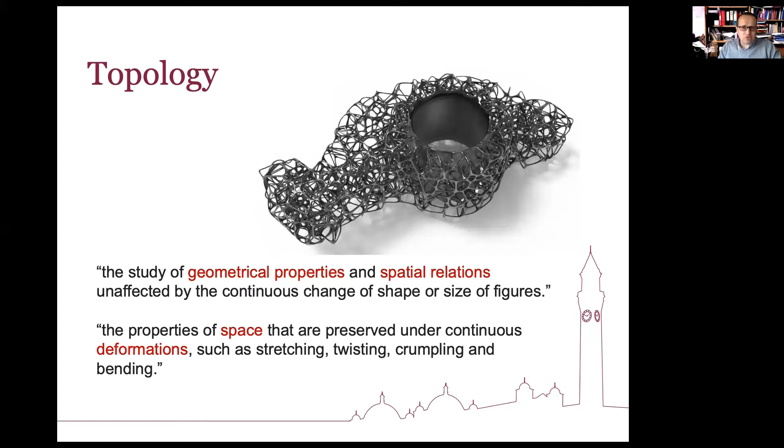For a number of years, people have been using topology optimization in additive manufacturing. Topology optimization is a mathematical framework applied in many software packages, where material layout can be optimized within a certain space by applying boundary conditions - whether mechanical loading, thermal constraints, heat transfer, fluid flow, and so on - with the goal of maximizing the performance of that component.

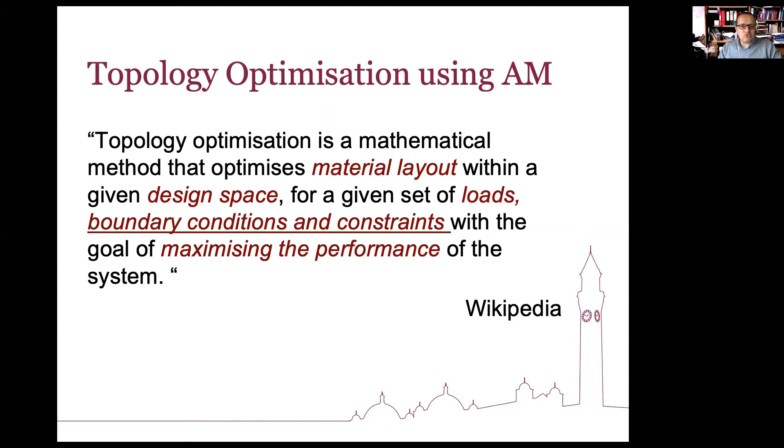One example seen at additive manufacturing conferences for years was the famous Airbus bracket, previously made out of steel, heavy at around 0.9 kilogram. The shape was not optimized for mechanical loading, so the maximum stress was around 840 megapascal. By using topology optimization to redesign the component in titanium, the shape was redesigned and printed by additive manufacturing, achieving a component almost half a kilogram less than the original.

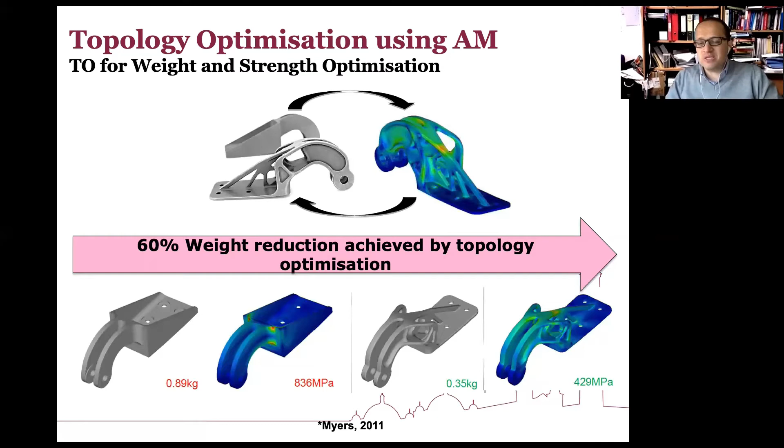Because of the use of struts and that kind of biological design, loads were distributed more homogeneously, with stresses approximately halved compared to the original component. So massive weight reduction and maximum load reduction were achieved by topology optimization. That's probably the commonest example, but what I'll talk about today is how the science and art of controlling where material is in space may improve the behavior of many other applications.

Today I'll give snapshots of different components and materials, like the ones available on the left-hand side, commonly printed nowadays: aluminum alloys, nickel superalloys, titanium alloys, nickel-titanium shape memory alloys, soft magnetic materials, materials with low coefficient of thermal expansion like Invar, and refractory metals used in high temperature applications.

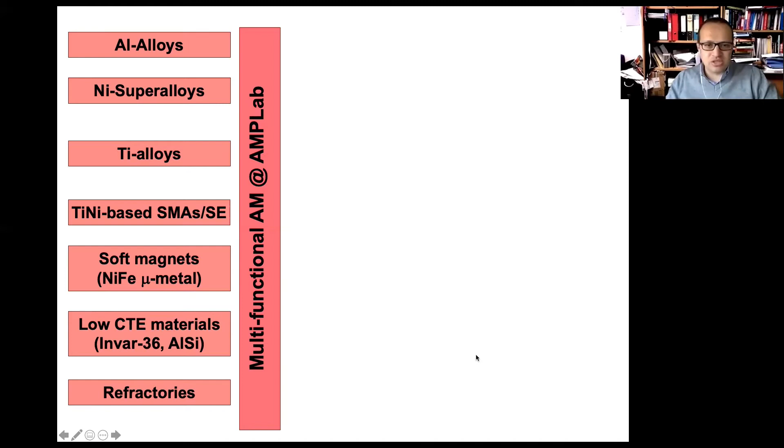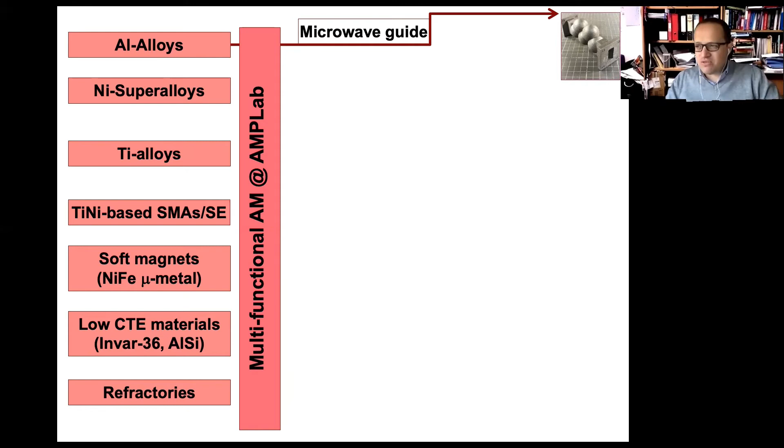When we put these in an additive manufacturing context, we get totally new applications, probably the first time we see them. The first one I'll talk about is radio frequency and microwave guides, which can be optimized and printed using additive manufacturing, achieving superb performance that can be very difficult to achieve using conventional manufacturing.

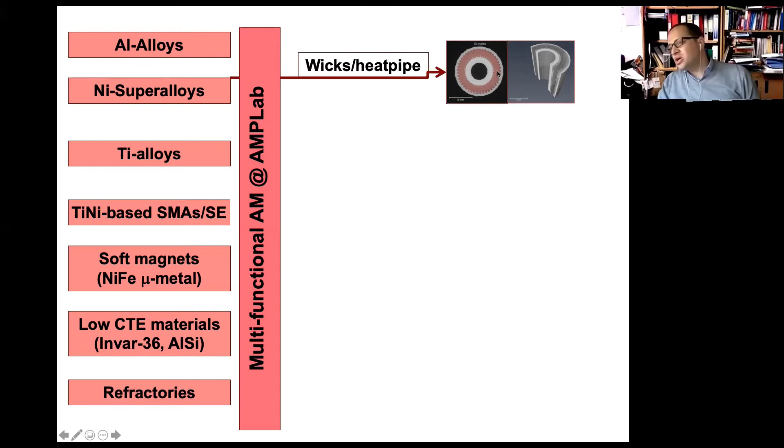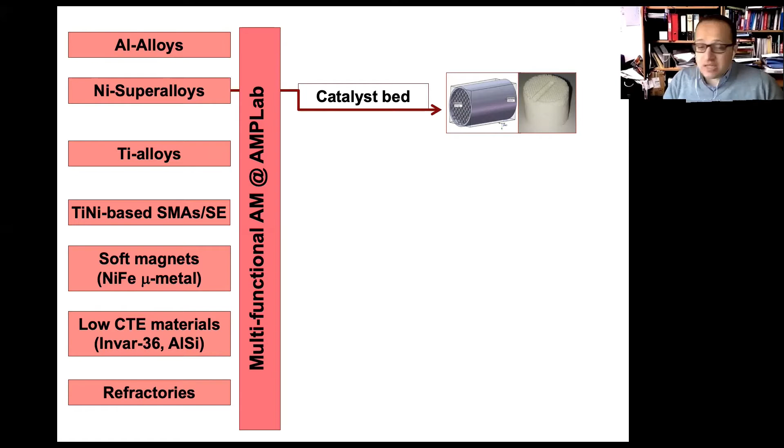Then I'll talk about nickel-based superalloys, printed to maximize heat efficiency and heat transfer properties of heat pipes for thermal management in different applications. I'll also talk about their application in catalysis, in components which require a high surface area to volume ratio to enable the application of high temperature loads.

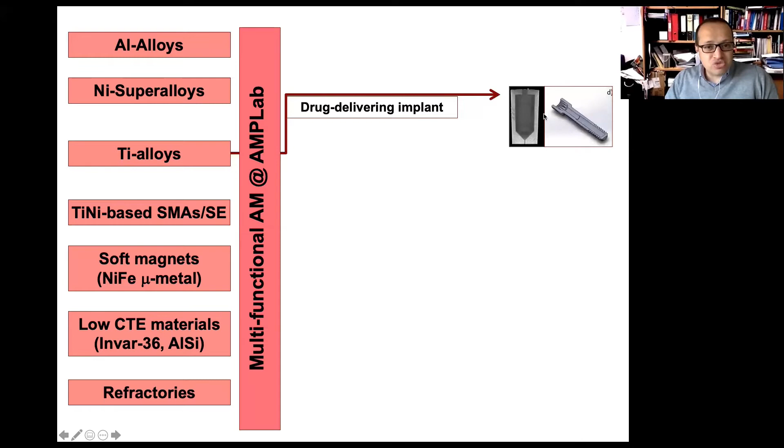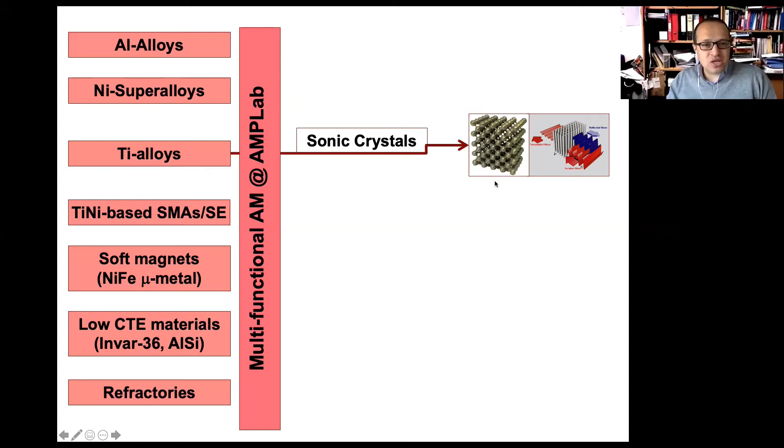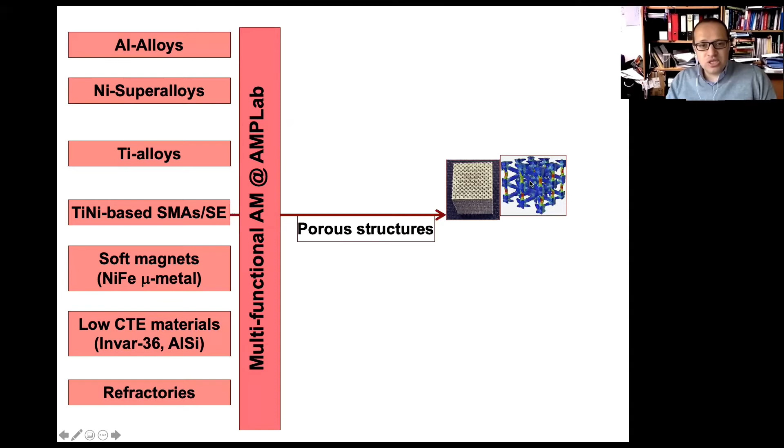From there, I'll talk about titanium implants and how they can be redesigned to deliver drugs by having cavities within those shapes. I'll talk about sonic crystals in titanium alloys, which are shapes with certain acoustic behavior achieved by optimizing topology. Then I'll talk about lattices and stents as a way of optimizing shapes and topology, and about porous structures and their applications in medical implants.

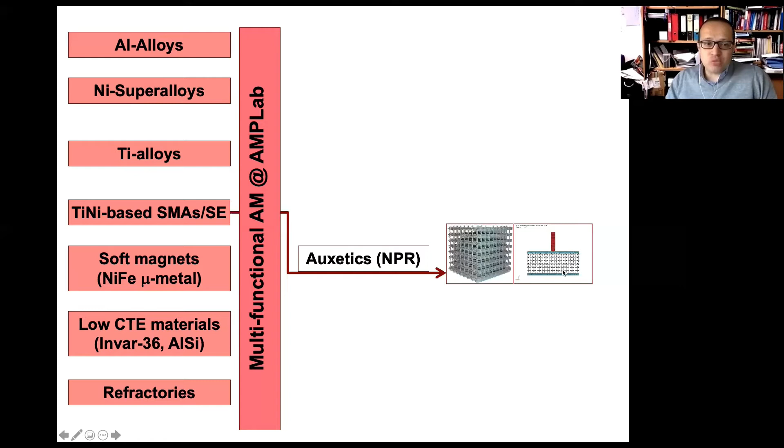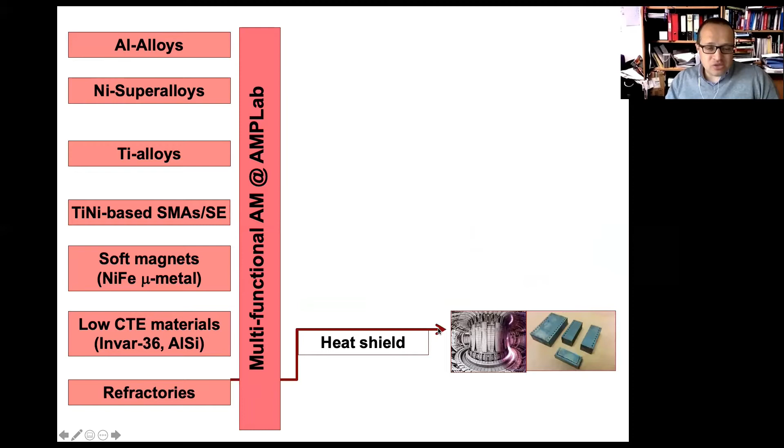I'll talk about negative Poisson ratio materials and their application in shock absorption. Beyond that, I'll talk a little bit about magnetic shielding and low CTE structures and materials. And then finally, I'll talk about high temperature refractories, applied in nuclear fusion applications, and also about X-ray collimation.

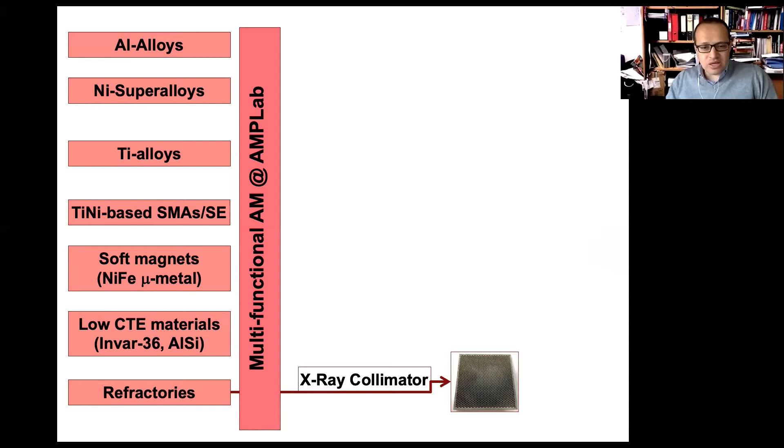Let me start by an exciting application which comes from the space sector. I showed you this shape, the so-called sonic crystals. Sonic crystals demonstrate an interesting arrangement of material in space, and that arrangement is used to dampen the sound waves.

As a sound wave goes through the sonic crystals, you can see that only a small amount of that big amplitude survives, and the majority of the amplitude is reflected backwards. So by designing the size of the ball and the distance between the balls, you can tune that structure to reduce the load and to block a certain sound frequency, provided that you know the frequency and exactly what you want to block.

This was part of a program we did with the European Space Agency looking into the use of these sonic crystals for noise reduction in launch pads, which are known to be very noisy. Through this, and by using additive manufacturing, you're able to create different complex shapes that can be used to tune the frequency and the noise damping behavior, allowing us to achieve much quieter operating structures.

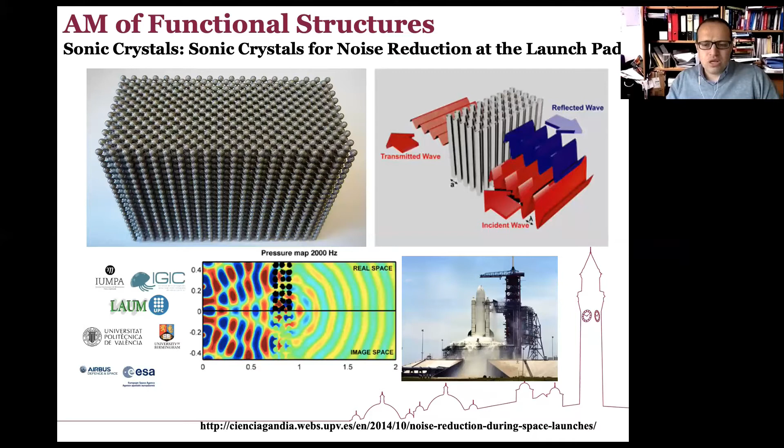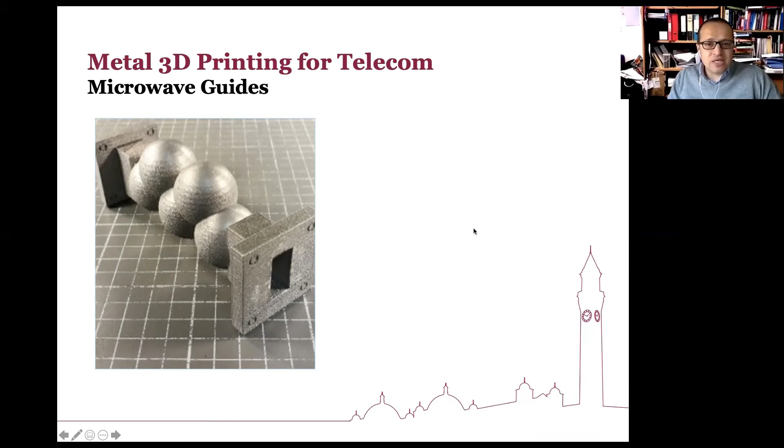We've been printing these parts out of aluminum alloys, which are well established and well defined in additive manufacturing. The good news is that the shape you print by additive manufacturing is literally spot on the required frequency, compared, for instance, with metal casting, where you see more significant variations in the tuning of the frequency of that shape.

More importantly, if you want to improve the level of quality of the signal, you can apply surface finishing using grinding techniques to clean the internal surfaces and cavities, allowing us to achieve a quality value, the so-called Q value, which is very close in quality compared with the ideal material, designed of pure aluminium with a surface finish of 1 micron RA.

Printing it using a high-strength aluminium alloy like this one can allow you to make the thickness much smaller, and as a result also achieve an additional benefit when it comes to weight reduction.

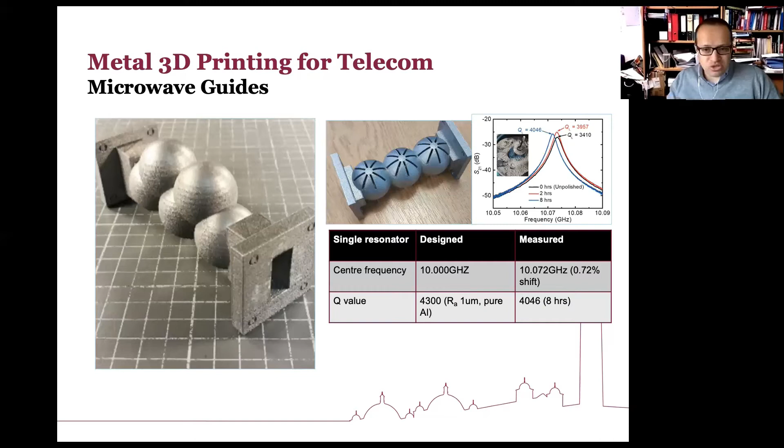Moving on into another application, one of the projects we're currently involved in at the University of Birmingham involves 3D printing for quantum, or so-called gravity sensors. These gravity sensors operate using a technology called cold atom technology, where they generate a form of material at very low temperature, and then the material becomes very sensitive to gravity fluctuations.

So if you put it on a satellite, for instance, you'll find out there's oil somewhere in Canada, or there's some tungsten or uranium in Chile. You'll know exactly where there are strong gravity fields at different locations in the material.

So the current shape of those gravity sensors looks like a Meccano set put together with a lot of components. What we've been doing is trying to make a nice packaging for them. One of the key factors we want to consider is the use of magnetic shielding to prevent any interference from surrounding magnetic fields.

If you're trying to measure fluctuations in the Earth's gravity field, you also want to eliminate any potential interference from the surrounding, but you also want this to be light and optimized, whereby you can have multi-wall shielding. This cannot be achieved by conventional manufacturing. So when you use additive manufacturing combined with something like multi-physics COMSOL simulation, you start to generate designs that enable a more enhanced way of shielding and generating those magnetic shields.

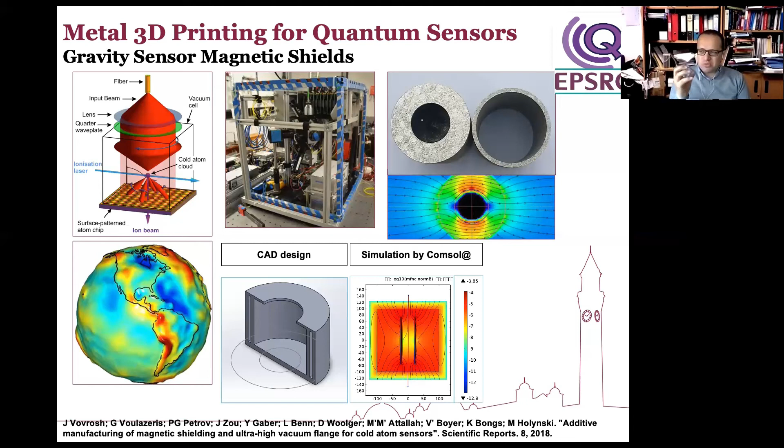I'll move into another application, looking at how we tailor the material, or the topology of the material, and where we put it. We did a project a while ago with Rolls-Royce looking into efficient cooling, through the use of what's known as heat pipes.

These heat pipes are typically made out of copper with powders inside, and they achieve cooling through the so-called wicking behavior, where the liquid just goes through the height and allows for heat to be lost through the component. Instead, what we tried to do was print them using SLM. We generated a structure with a very high surface area, as you can see in those teeth in front of you. Each one is around 100 microns, and in terms of height, around 1 millimeter, and they surround the shape.

They are very rough, but being rough was also good, because if you compare the response of these printed structures in terms of wicking behavior, the copper reference had a response time of around 7 seconds to reach around 40 in height. Whereas the structures made by additive manufacturing, using simple notches or grooves or simple shapes, were able to reach roughly the same height but in a much shorter time. So by playing with the topology and the design, we're able to achieve more efficient cooling and a much more rapid thermal response from these shapes and structures.

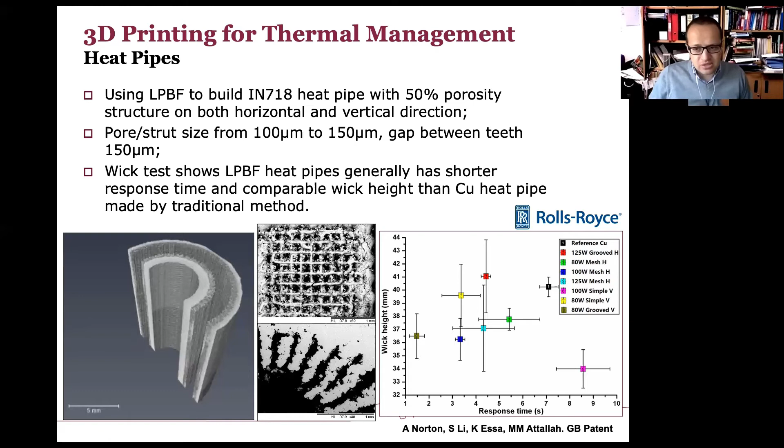Normal shapes, normal materials, if you apply load into them, become short and fat. Whereas this material, if you apply load into it, becomes short and actually gets smaller. That's because the design of the material causes the struts and links to move inside and close together.

We did a project with DSTL, the UK's Ministry of Defence, looking into the application of this technology into armor, especially if the armor is hit by this material. Basically, the material will move towards blocking the impact and densify to prevent it from progressing further inside the material. So if you put the same amount of material as a simple block compared with putting the same amount of material as an auxetic shape, you achieve much more significant behavior from an armor point of view, preventing material progression when hit during impact.

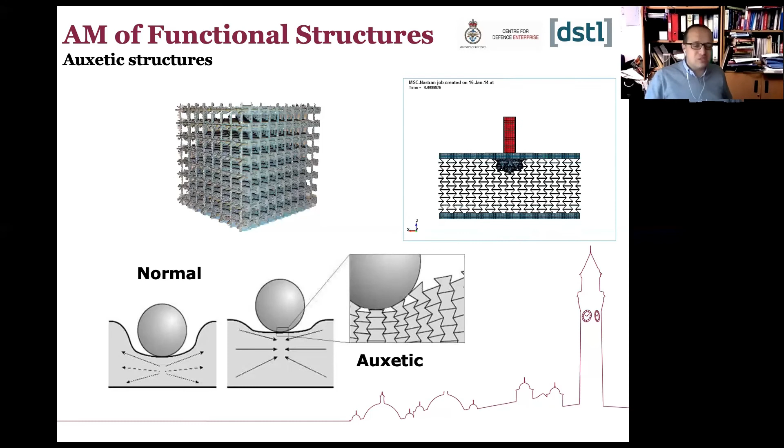Talking more about topology and how it can be interestingly computed and controlled, this is one of our current projects which looks into 3D printing of stents. As we all get old, we end up having what's known as stenosis, so our arteries start to become narrower. Usually the cardiologist has to interfere with something we call a stent to open the arteries and allow blood flow to flow normally inside the body.

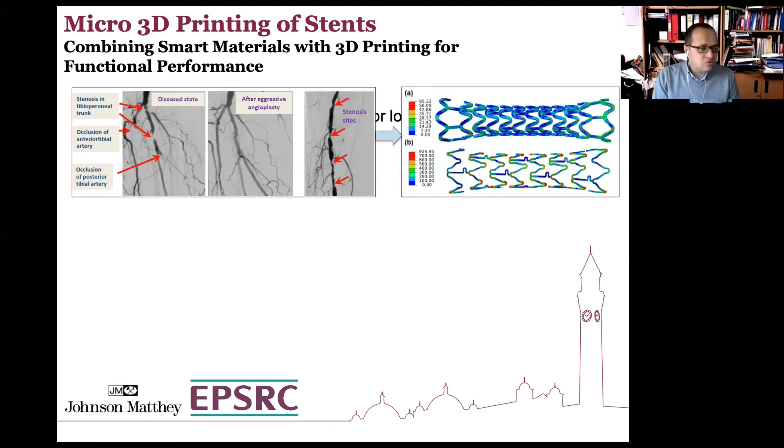The problem is that in many cases they find multiple stenosis sites, so they add 1, 2, or 3 stents in order to open up the full artery. What we said is, why don't we try to customize the stent by doing the topology customization for the patient? So the stent's design itself, exactly like people have been doing with medical implants, becomes customized to the patient, tailored according to the lesion itself, the anatomy of the patient.

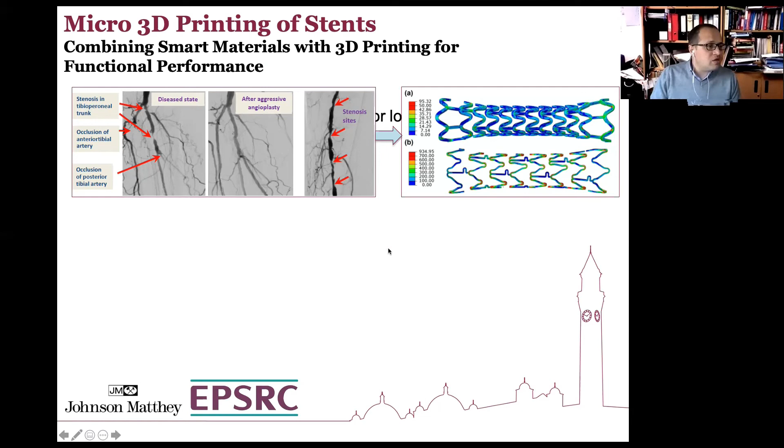From there, we start to print those stents, and we've been testing how they behave inside a vessel used to simulate blood flow. So far this has been filed for a patent, because we're looking into how this can potentially be the next thing in additive manufacturing of stents, so that we can control and create customized stents in the same way that people create customized medical implants.

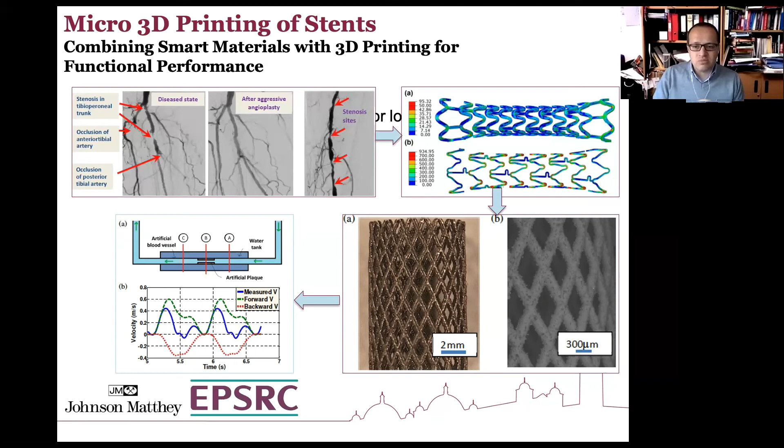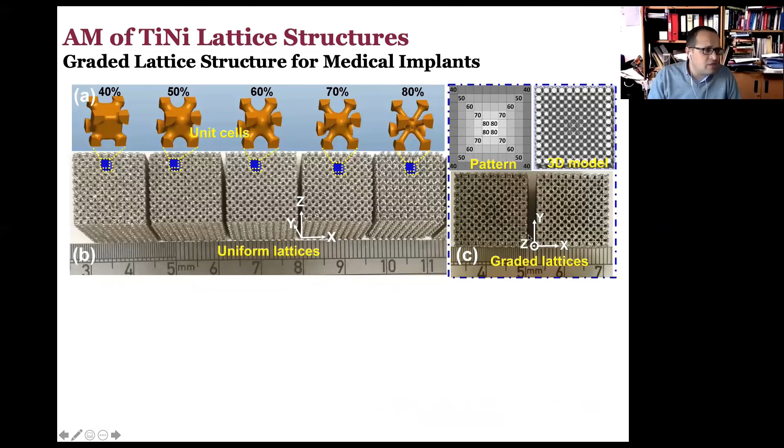Lattice structures and uniform arrangement: this is an example of the graded lattice, where the porosity in the middle is different from the porosity at the edge. When we looked into their mechanical loading, we found that the material with the uniform lattice usually has that 45-degree densification behavior.

So eventually it breaks in that direction. These are position maps measured by digital image correlation. Whereas if you are making a material where the density changes from the outside to the inside, the part itself starts to squeeze and change its geometry, closing upon itself, similar to how auxetic materials behave.

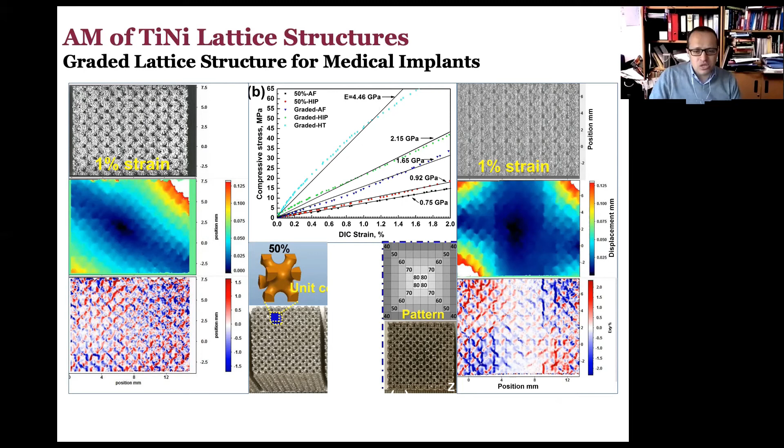Looking into these materials, one of the things we found was that by playing with the design, we can control the degree of porosity and even control the elastic modulus, achieving very low levels of elastic modulus, approximately 5 gigapascals or even lower, close to the density of bones. This can enable us to tailor the parts of medical implants from the outside to the inside to mimic the mechanical behavior we need in those stents and medical implants, compared with the bone.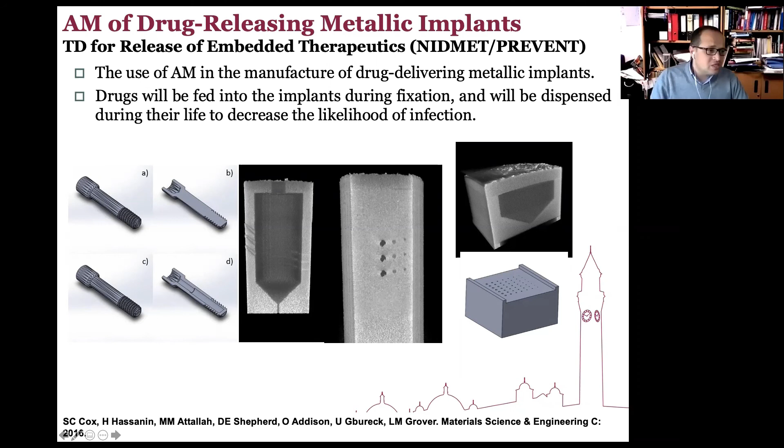One of the challenges we faced was how to create the right size hole, and that involved significant optimization to get there. In additive manufacturing, if you want to make a 0.5 mil hole, you're unlikely to get exactly that - you're probably going to get something like a 150 micron hole. So we did a lot of optimization to achieve the right dimensions of the holes to allow the drug to leak from different locations.

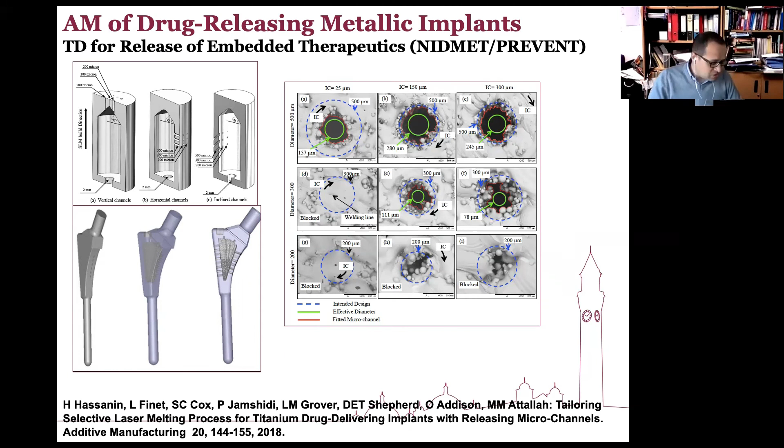So this is where we are. I'll take this as a chance to announce one of the newest programs we've started in Birmingham, which I'm greatly excited about.

We've recently started an initiative on a Center for Doctoral Training in Topological Design, teaching people about the science and art of topology, linking it into themes like topological design in mechanical, thermal, and vibration engineering, application in quantum physics and technology like the case study I've given you, and application in electromagnetism and photonics.

I didn't cover that one, but that's another way topological design can optimize things related to optics or electromagnetism. There's also topological design in health and life sciences, as I showed in the stents case study, application in soft matter and chemistry which is still evolving, the math, computation and data sciences of topological design, and last but not least, manufacturing and 3D printing using topological design.

We are very excited about this initiative. Since then we've created an ecosystem that links people who work in theory with the so-called enabling technologies, looking into applications in the themes I mentioned and covered a minute ago.